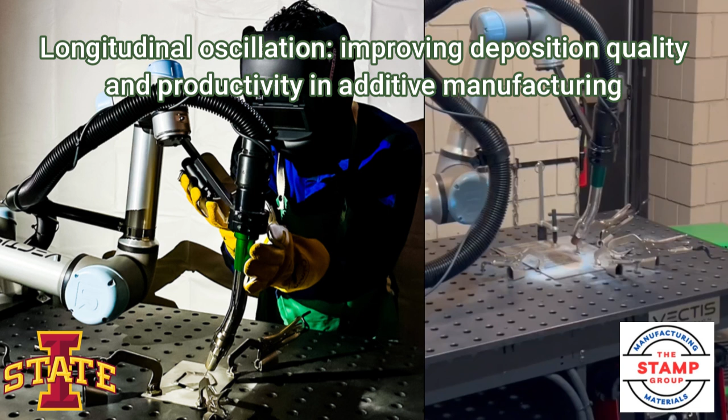Okay, get this. Imagine a robot that can 3D print enormous metal objects. I'm talking parts for a bridge, an airplane, or even a rocket, literally building it right in front of you. It sounds like something straight out of sci-fi, right? Well, it's not. It's happening right now, and the tech is getting faster and smarter by the minute.

But here's the catch, and it's a big one. When you're dealing with molten metal, trying to go fast is really, really hard. So how in the world do you speed things up to build big stuff efficiently without the whole thing just turning into a lumpy, weak disaster? Well, the answer lies in a process with a super technical name, COBOT-WAAM. Yeah, it's a mouthful, I know, but stick with me.

It basically means you have a smart, collaborative robot, that's the COBOT part, doing a special kind of 3D printing with a metal wire and an electric arc. Just picture a super precise robotic welder building an object up, one layer of metal at a time. It's an amazing process for these huge jobs.

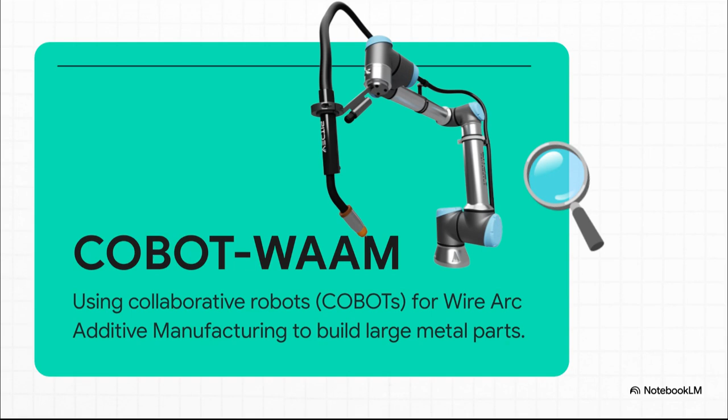All right, so here's where the plot thickens. In manufacturing, time is money, right? You gotta go fast to be productive. But, and this is a big but, when your main ingredient is a tiny pool of molten metal, just cranking up the speed causes some major problems.

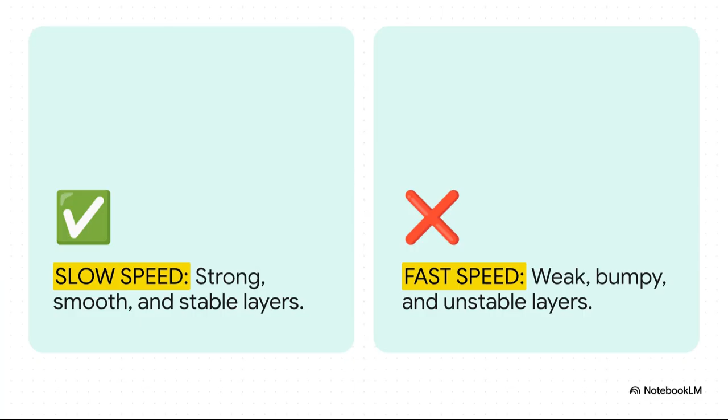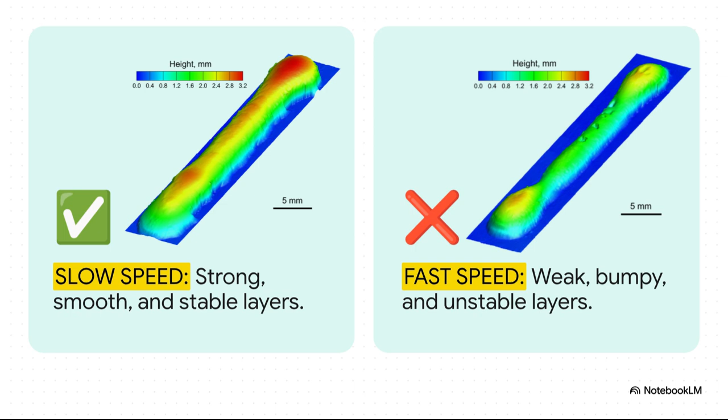It really boils down to this classic trade-off. If you go slow, the metal lays down beautifully. You get strong, smooth, stable layers. High quality for sure, but it takes forever. If you try to speed up, the whole process gets chaotic, and you end up with weak, bumpy, unstable layers. And yeah, weak and bumpy is not a phrase you want to hear when you're building a part for a rocket.

So what's actually going on here? Why does going fast mess it all up? Well, the research puts it perfectly. At high speeds, the molten metal actually creates a backflow. The best way to picture it is like trying to squeeze frosting out of a piping bag way too fast. It doesn't come out in a nice, smooth line. It just kind of bunches up and gets all wavy.

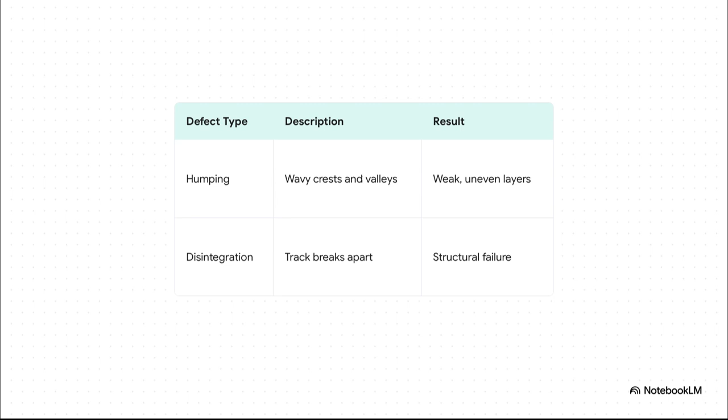And these ugly results actually have names. You can get something called humping, where the metal track looks like a series of bumpy waves, creating all these weak spots. Or you can get something even worse, disintegration. The name says it all. The track of molten metal literally just breaks apart into separate little blobs. It's a complete structural failure, an engineer's absolute nightmare.

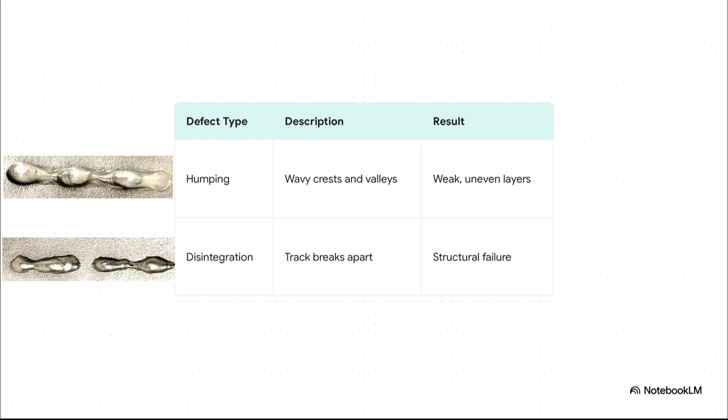So that's the puzzle, right? How do you get speed and quality? You need both. And this is where the researchers came up with a solution that is so elegant and sounds so simple, it's almost funny. They just taught the robot a new move.

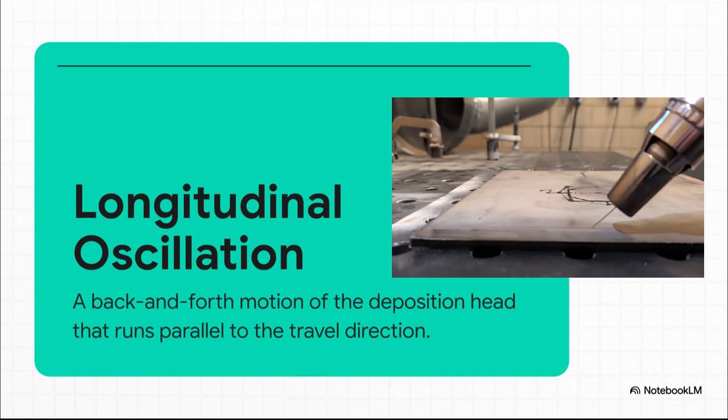The fancy scientific name is longitudinal oscillation, but let's just call it what it is. It's a wiggle, a very controlled, very precise back and forth wiggle. So as the robot is moving forward and laying down the metal, its head is also moving forward and backward in this perfect rhythm. This isn't some random vibration. It's a carefully engineered dance move.

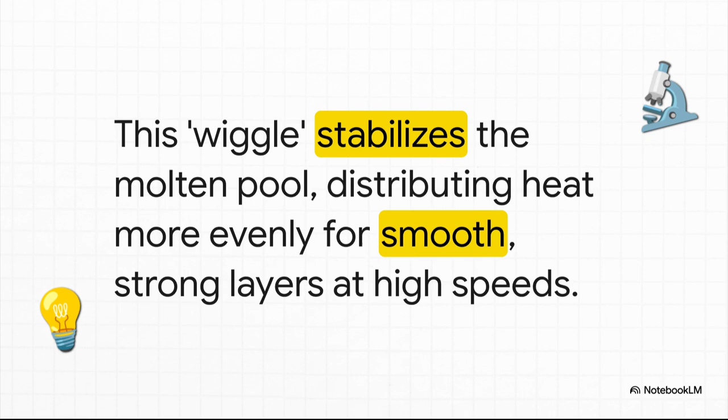So why on earth does a wiggle fix everything? Well, the idea is actually genius. That constant motion basically stabilizes the chaotic pool of molten metal. It acts like you're constantly stirring it, spreading the heat out more evenly, and stopping that nasty backflow we talked about. The dream is to get those perfect, smooth layers, but now at super high speeds.

It sounds great on paper, right? A simple little wiggle solves this massive manufacturing problem. But the proof is in the pudding. Does this thing actually work when you put it to the test? Oh, you bet it does. The results are just wow. Look at this chart. It tells the whole story. It's showing track height deviation, which is just a fancy way of saying how bumpy the layers are.

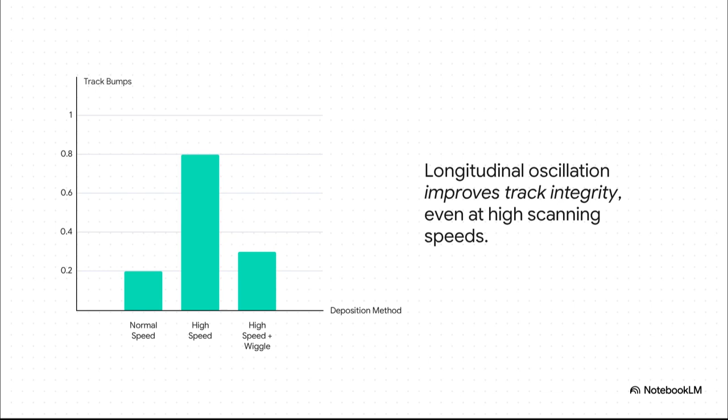Low is good, high is bad. So, bar 1 is normal, slow speed. Nice and low, just what we want. Bar 2 is high speed with no wiggle. And yikes, the bumpiness shoots through the roof.

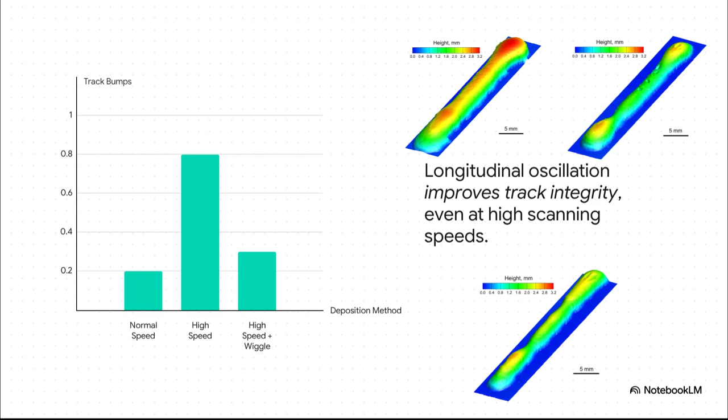That's our problem. But then look at bar 3, high speed plus the wiggle. And bam, the bumpiness drops right back down to where it should be. It's not just an idea, it's a total game changer. Okay, so the wiggle works. Awesome. But it turns out you can't just shake the robot and hope for the best.

To get those perfect results every single time, the researchers had to figure out the exact right kind of wiggle. They had to find the recipe for success, the absolute sweet spot. And how'd they do that? With a ton of work. We're talking over 75 different experiments, tweaking every little variable you can think of.

They took all that data and used it to create these incredible process maps. And really, you can think of them like a treasure map for engineers, showing them the exact path to a perfect print. What these maps do is show you exactly what to do and what not to do.

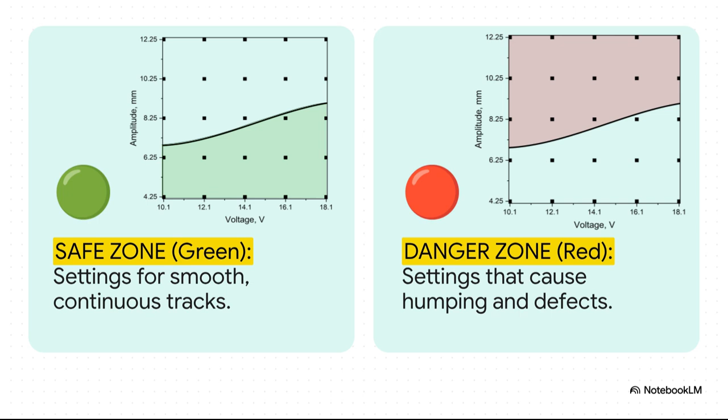There's a safe zone, that's the green area, where your combination of settings gives you smooth, beautiful, strong tracks. And then there's the danger zone, the red, and that's where you get all those nasty humps and defects. The goal is simple: stay in the green. So, what did they figure out?

What's on these maps? Well, for one, the size of the wiggle, the amplitude, is a huge deal. A smaller, tighter wiggle gives you more cycles, which distributes the heat better and gives you a smooth track. But if you use a bigger, wider wiggle, you get fewer cycles, which leads to uneven heating and, you guessed it, a bumpy track.

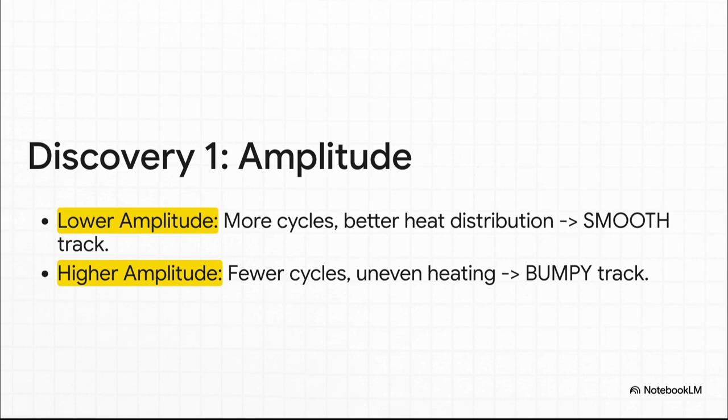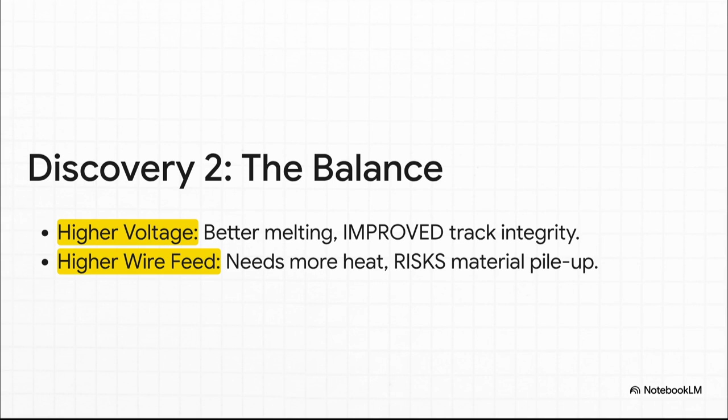Next up, they found this really delicate dance between the heat, that's the voltage, and how fast you're feeding in the metal wire. It's kind of like cooking, right? You need enough heat to properly melt the wire. But if you feed the wire in too fast for the amount of heat you have, you just get a big pileup of material, a gloopy mess.

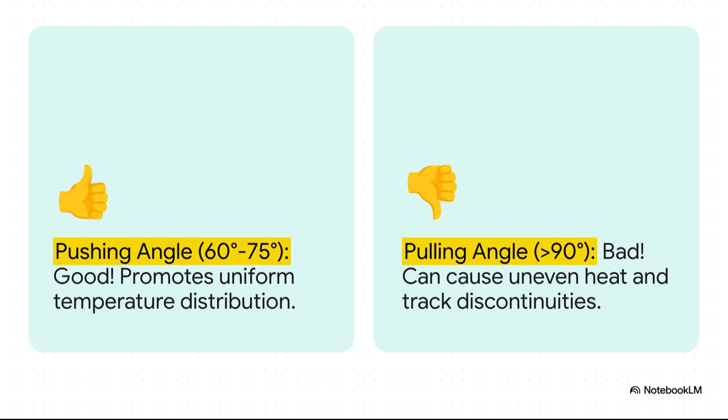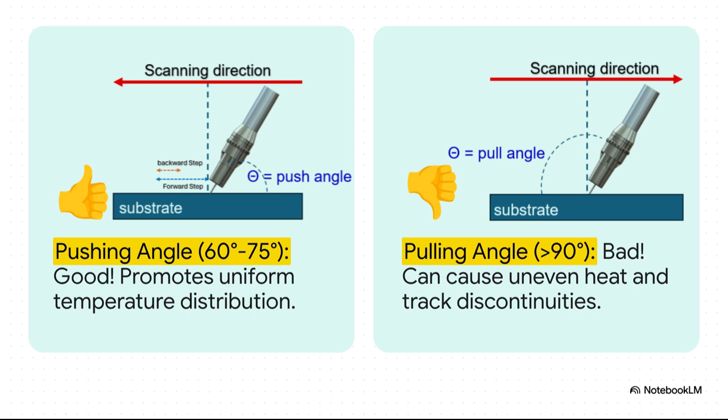And get this, this detail is just wild. It turns out even the angle of the printing torch matters a lot. They found that a pushing angle, somewhere between 60 and 75 degrees, works perfectly. It creates uniform heat. But a pulling angle, anything over 90 degrees, causes all sorts of problems and can lead you right back to those defects. It's one of those tiny little details that changes everything.

So, when you take all these discoveries, the wiggle, the amplitude, the voltage, the angle, and you put them all together, what you get is a clear, reliable playbook for the future of manufacturing large metal parts. The path forward is suddenly crystal clear. Step 1. Crank up the speed for productivity. Step 2. Turn on the magic wiggle. Step 3. Use those process maps to dial in all the other settings to that perfect sweet spot.

And the result? You get a strong, smooth metal part built faster than we ever thought possible. And you have to remember, this isn't just some theory someone dreamed up. This is backed by serious, rigorous science. More than 75 detailed experiments prove that this works.

So what's the big takeaway from all this? It's simple, and it's huge. That old nagging conflict between going fast and getting high quality in metal 3D printing, it's been solved. Thanks to a clever wiggle and some really careful science, we can now build bigger, faster, and better.

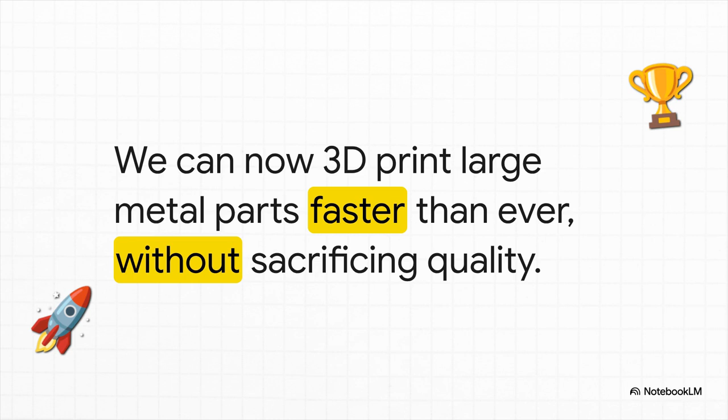I think what's so amazing is that this entire leap forward came from teaching a robot a simple back and forth motion. It really makes you wonder, doesn't it? What's the next small, elegant trick that's going to unlock another giant leap in how we build the world of tomorrow?